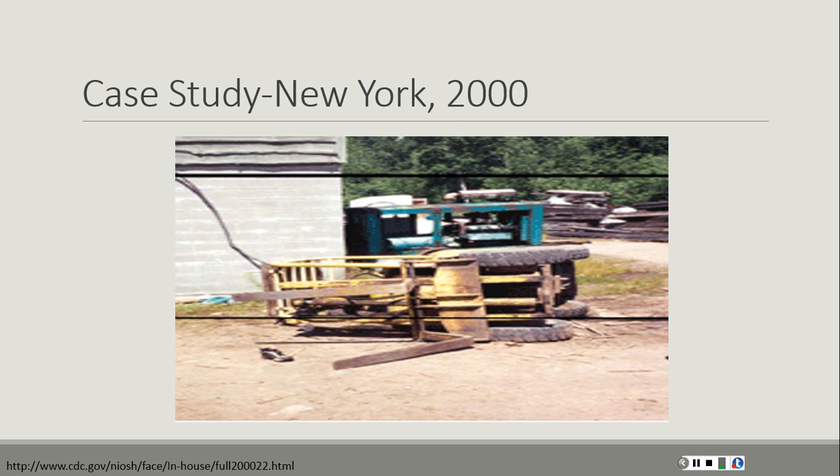At a lumber yard in New York in 2000, a 17-year-old laborer was killed when the forklift he was operating tipped over and crushed his head. The victim was asked to move the forklift from the area where the lumber is stored to the sawing area. On the way, a co-worker accepted a ride from the victim and rode on the right side of the forklift holding onto the overhead guard.

After traveling roughly 135 feet, the victim took a sharp left turn, causing the forklift to overturn towards the right. The co-worker was able to jump from the forklift, but her ankle was pinned beneath the machine. She suffered minor injuries. The victim, however, was thrown from the seat and became pinned between the overhead guard and the ground. He was taken to the ER and pronounced dead.

In another accident at a warehouse in Arizona, another 17-year-old laborer died when the forklift he was operating tipped over and crushed him. The victim had a load on the forks and was traveling with the mast fully extended. As the employee attempted to make a right turn, the victim lost control of the forklift and it overturned toward the left side.

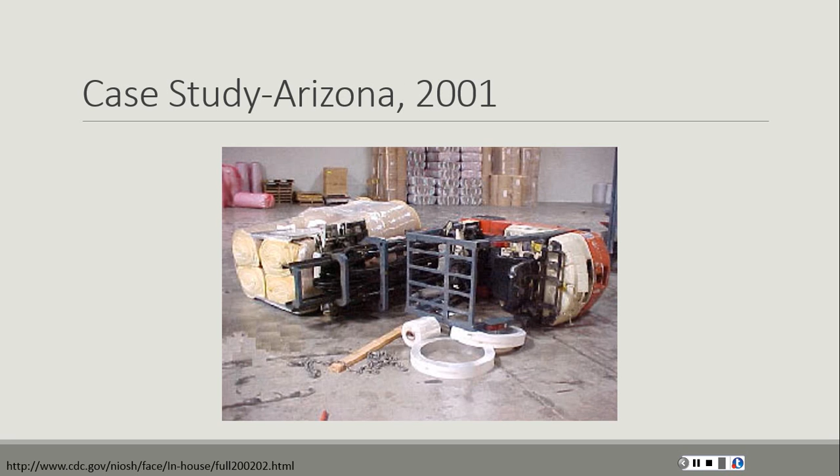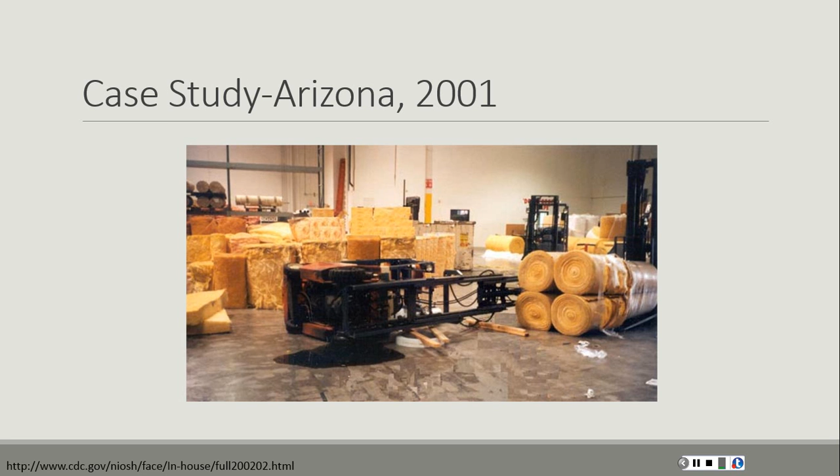The victim, who was not restrained, was thrown from the vehicle and crushed underneath the extended mast of the forklift. Two forklifts were needed to lift the overturned forklift off of the victim. He died of blunt force injuries to the neck and chest and traumatic asphyxia. These are just two examples of fatalities that resulted from powered industrial truck accidents.

Before we get started on the hazards associated with powered industrial trucks, let's take a look at what they are. Under the OSHA standard, powered industrial trucks are mobile, power-propelled trucks used to carry, push, pull, lift, stack, or tier materials. They can be ridden or controlled by a walking operator. Earth-moving and over-the-road hauling trucks are not included.

One of the things that gets people into trouble when working with powered industrial trucks is the idea that they are similar to the car they drove to work. Cars and powered industrial trucks are different in many ways. Powered industrial trucks are often heavier, have an open structure, utilize a 3-point suspension system, have a tighter turning radius, and are overall less stable.

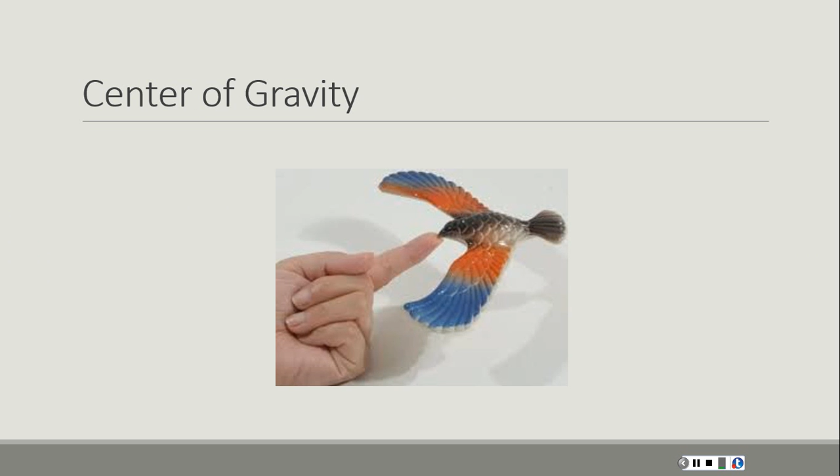One of the key differences between cars and powered industrial trucks is the changing center of gravity. The center of gravity of an object is the average location of the weight of that object. The center of gravity helps keep you balanced so that you don't fall over. Surely you've seen these birds before. They can balance on the tip of your finger because the center of gravity is in its head.

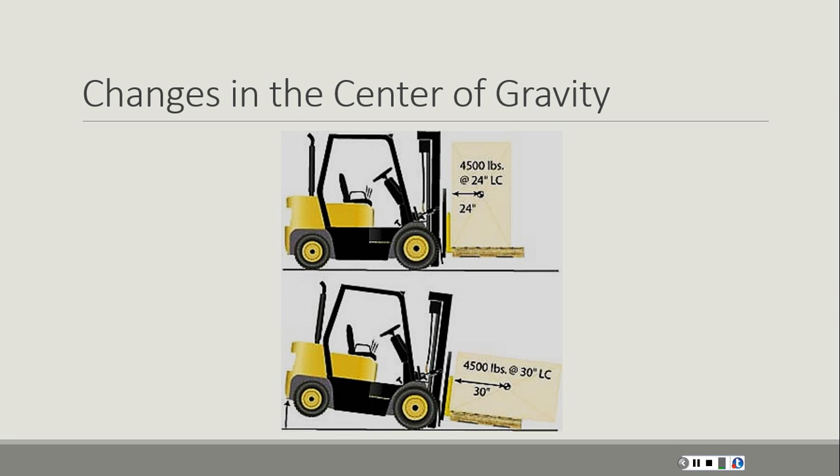A powered industrial truck's center of gravity changes when it carries a load. This is because the center of gravity of the truck and the load are combined to create a new combined center of gravity. Changes to this can be caused by many factors, including how high the load is raised, how heavy the load is, and the position of the load's center of gravity in relation to that of the truck.

Most industrial trucks use counterweights in their rear that allow them to lift heavy loads while minimizing the changes to the center of gravity. This works like a seesaw, adding more weight to one side, which allows a heavier weight to be lifted on the other. Any modifications to increase counterweight should be approved by the manufacturer. Having your friend sit on the back of your forklift is not an approved counterweight.

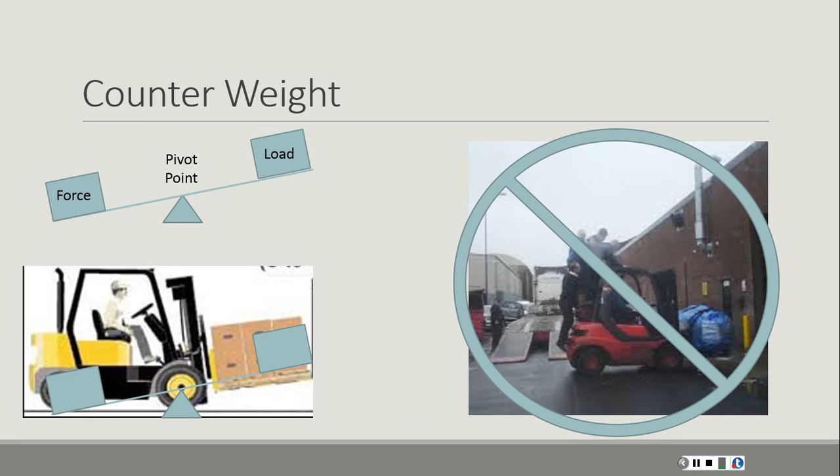Another way powered industrial trucks differ from cars is their 3-point suspension system. This system forms the stability triangle. As long as the combined center of gravity of the truck and the load is kept within this triangle, the forklift is stable. But if the combined center of gravity goes outside the triangle, then the forklift will tip over.

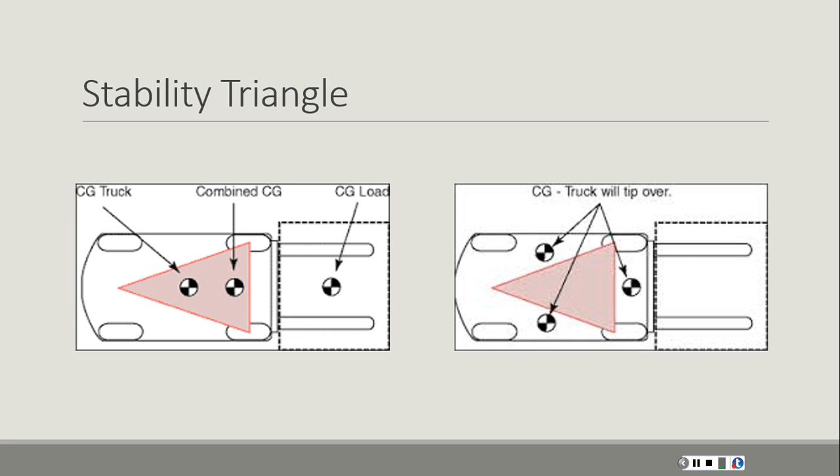Since we live in a 3D world, we can actually think of the stability triangle as a 3-sided pyramid that has a ball on a string hanging down to represent where the center of gravity would be. Carrying loads higher moves the center of gravity higher up in the pyramid and decreases the size of the stability triangle. This makes it more difficult to stay inside the stability triangle.

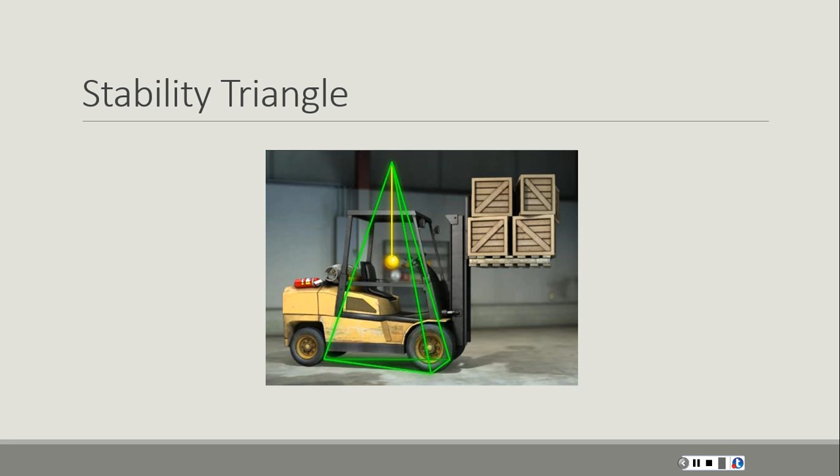There are a number of factors that contribute to powered industrial truck tipping. Speed is one of them. Turning at a very high speed can cause the forklift to laterally roll onto its side. This is similar to the incident in the first case study. Stopping quickly when speeding can cause the center of gravity to shift towards the front, causing the powered industrial truck to tip over.

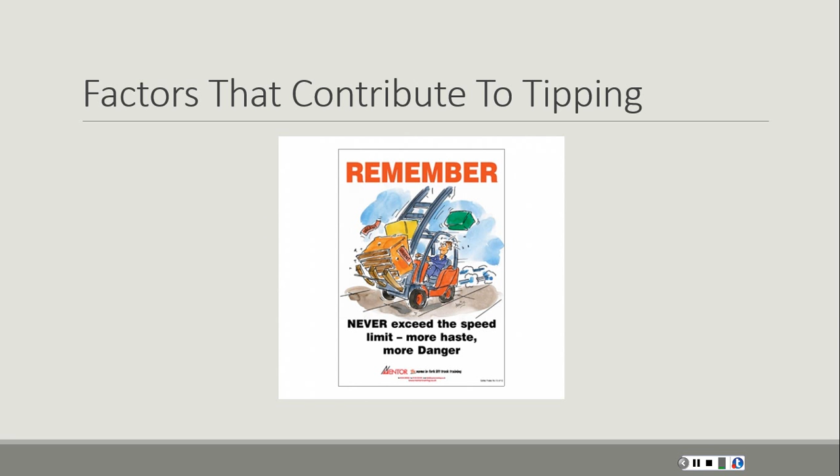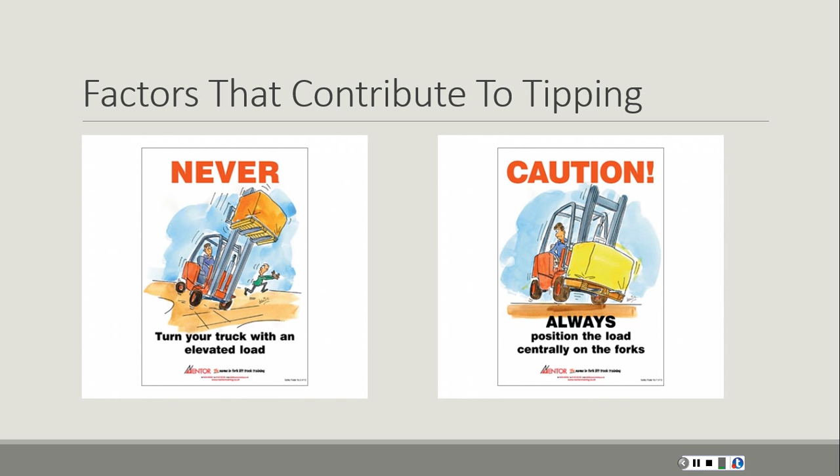Another factor that contributes to tipping is carrying loads improperly. Carrying loads too high can cause the industrial truck to tip, like in the second case study we talked about. Traveling with the load center of gravity too far forward on the truck's forks can cause the truck to tip because the combined center of gravity is outside of the stability triangle.

The environment in which the powered industrial truck is being operated can also contribute to tipping. Never turn on an inclined surface. Always drive straight up and down inclines with the load facing uphill. Avoid rough terrain unless the forklift is designed to be driven on it. And if you need to cross railroad tracks, they should be crossed at a diagonal to minimize the impact to the truck.

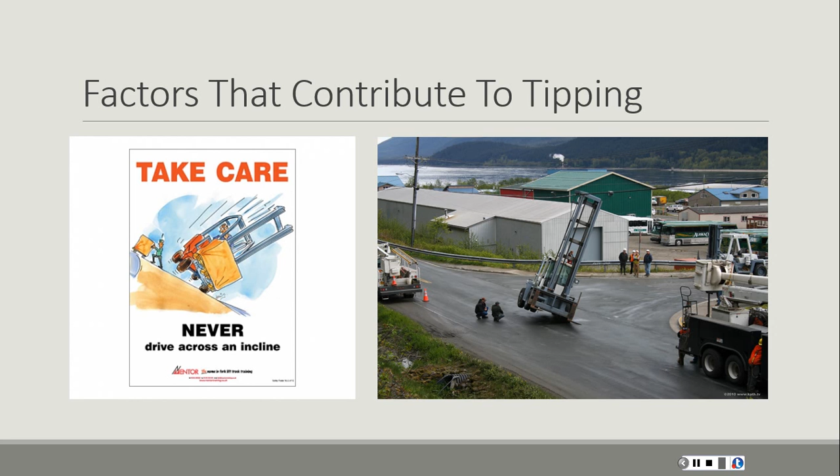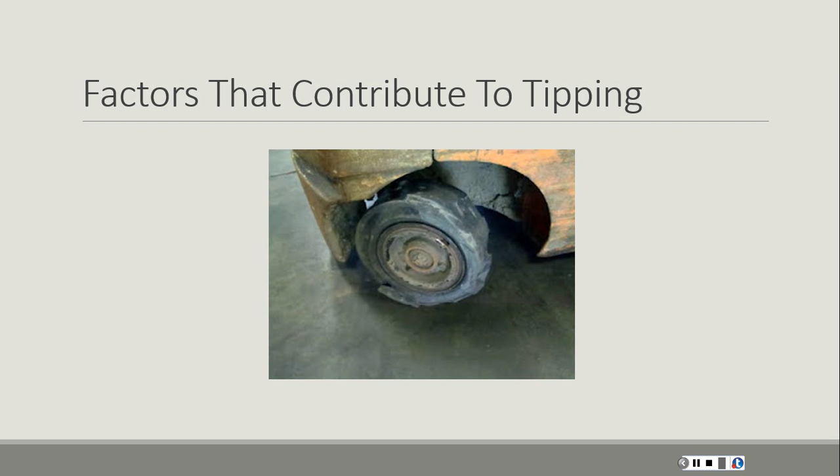A truck that is in poor condition can contribute to tipping. Worn or flat tires can cause instability. Other damaged parts in the steering or suspension systems can lead to tipping as well. This is why it is important to inspect all aspects of the truck before you operate it each day. Damaged trucks should be removed from service and repaired as soon as possible.

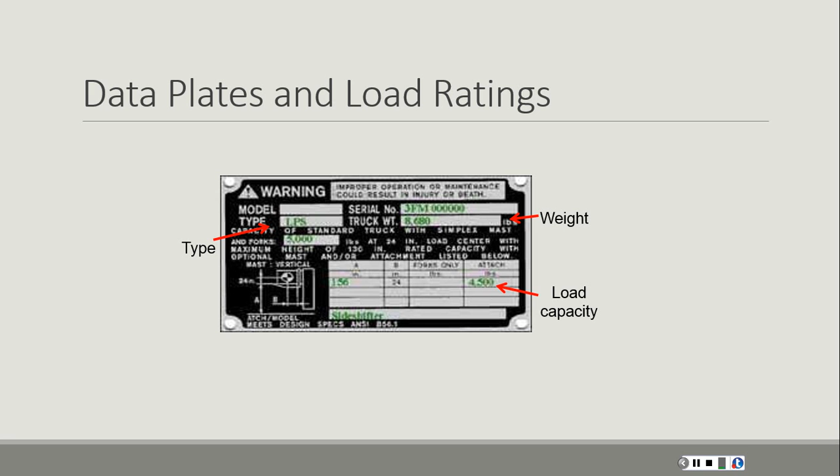Each powered industrial truck comes with a data plate from the manufacturer. This plate tells you everything you need to know, including the truck model and serial number, truck weight, load capacities, and maximum height. You should never use a powered industrial truck without the data plate. The information on the plate will keep you from tipping.

The best way to prevent injury during a tipping accident is to always wear your seatbelt. In this case, the seatbelt is not used so much to keep you from being thrown from the truck, but to prevent you from jumping out. Never attempt to jump from a tipping forklift. Remember that mouse trap? Brace yourself by planting your feet and holding tightly to the steering wheel. Always lean forward and away from the impact.

In this video, we have covered what makes powered industrial trucks more hazardous than cars, the factors that contribute to tipping accidents, and what to do if your industrial truck starts to tip. If you have more questions regarding powered industrial trucks, reach out to your company's safety department. Be safe out there, and don't be a victim of the mousetrap.